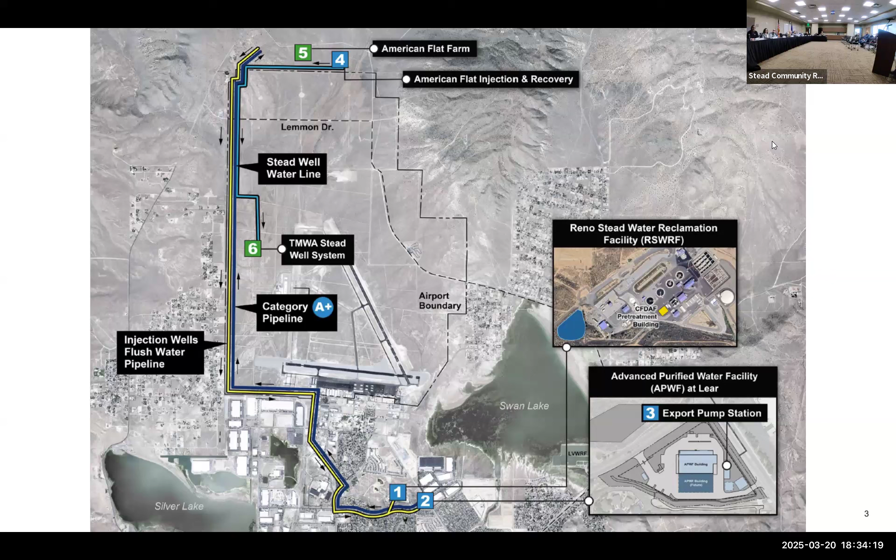Right now the effluent from that plant is discharged to Swan Lake. So this project allows us to take full advantage of that 4 million gallon per day treatment capacity - we can still send 2 million gallons per day to Swan Lake, and send another 2 million gallons per day up north to the American Flat aquifer for storage. That's how we get the 4 in and 4 out. Initially we'll be sending a lot of that flow to American Flat, which mitigates stormwater and flooding concerns at Swan Lake, so there'll be quite a bit less initially going there. That's a bit of the overview.

I'll turn it over to David Deagle to get into more detail about noise and other impacts during construction and after. Thanks, Dustin. David Deagle, Engineering Manager for Truckee Meadows Water Authority, for the record.

This is the American Flat treatment site - this is where we're going to treat it to A+ water. So the effluent coming out of Reno Stead, we'll treat it to drinking water standards, and like Dustin said, pump it out to American Flat, inject it into the ground to get that environmental buffer. In the future, we'll have extraction wells out there and make that connection to the Stead system for Truckee Meadows Water Authority. An initial benefit you'll see right away is we'll be able to rest the wells in the Stead system - the groundwater wells already here by the airport. We'll be able to rest those and use this water instead. This is a drought-resistant water source for us. It will always be here.

And so this is kind of the point for TMWA and what we're here for. As far as the CUP, SUP process, we talked about noise as a concern, so we wanted to bring that back through. This is the site a little bit.

I wanted to highlight a few things. The residential is here, you've got Lear and military, that's the corner. This is the main building where the treatment process is. Here's the transfer pump station moving water from Stead over. And then you've got a couple tanks here. We store the effluent here, and then that's the pump station that pumps it seven miles.

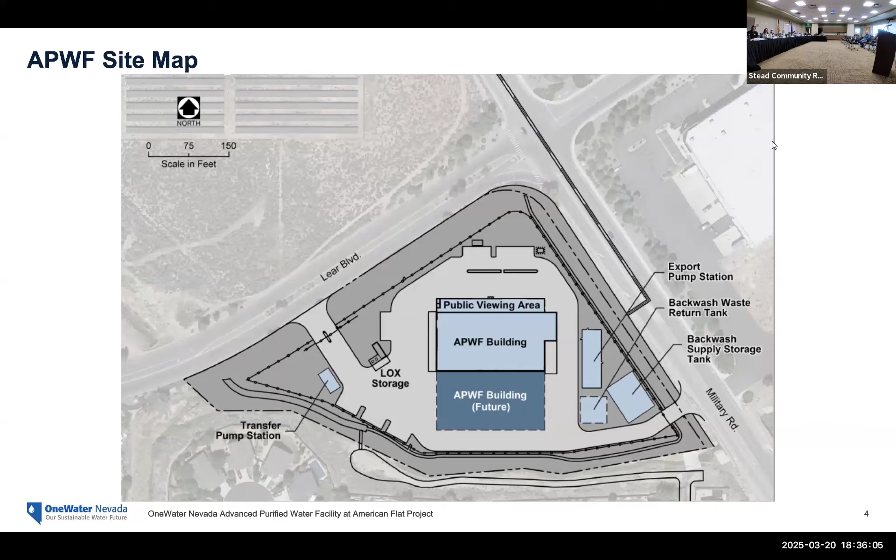If you would switch it, please. This is what the building's going to look like.

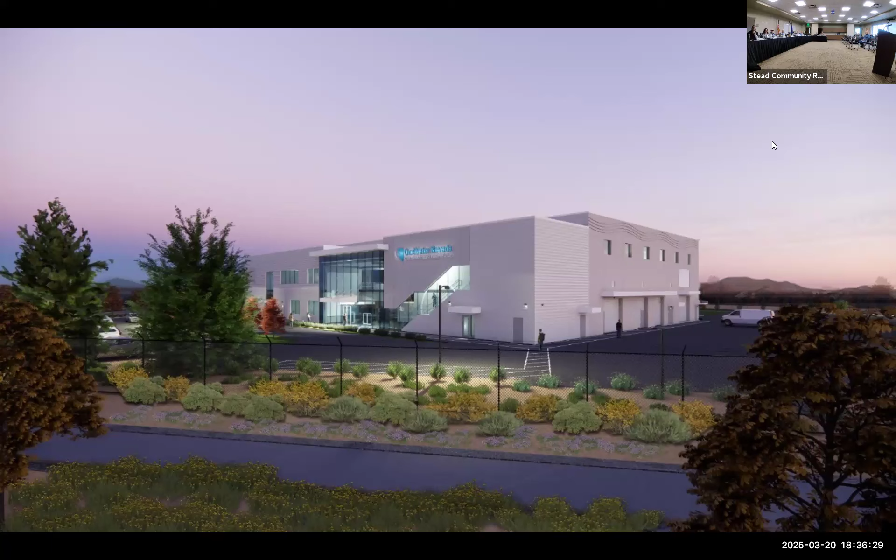You're standing a couple hundred feet down Lear, looking at the facility. This is the front. We've got a little education center in the front where we're going to ask the public to come in for school tours and that kind of thing. You get to learn a little bit about how the process works and how this technology is done elsewhere. But this is going to be new for Nevada, to create this, put it in the ground, and bring it into the system. The next one, this is another view looking from Horse Creek.

So the noise mitigation strategy, as part of the environment, we have federal funding and an environmental study that was done. A noise study is part of this, both during construction and after, and I'll be going through the results of that. The acoustical study demonstrated that in-building operations will not exceed the allowable noise thresholds per city code. The construction noise will be addressed by the conditions of approval of hours and days allowed in construction, which was part of that environmental study.

Go to the next one, please. So part of it is we put the treatment inside. There's a lot of reasons for that - it freezes and that kind of thing. Also, noise mitigation is very concerning to us. So our type of construction is we have insulated concrete panel walls. We do that for energy code reasons, but also for noise reasons. So it's quite low. We'll see in the next slide where we actually end up lower than the nighttime 49 dB, and we're also lower than the ambient noise in the area based on the study.

So we have limited hours of delivery. We only plan on delivering during the day, and I'll get into that. That's the National Environmental Policy Act - that was the mitigation measures done as part of that study. That report is available if needed. And then the Planning Commission conditions of approval, I'll go through on the next slide.

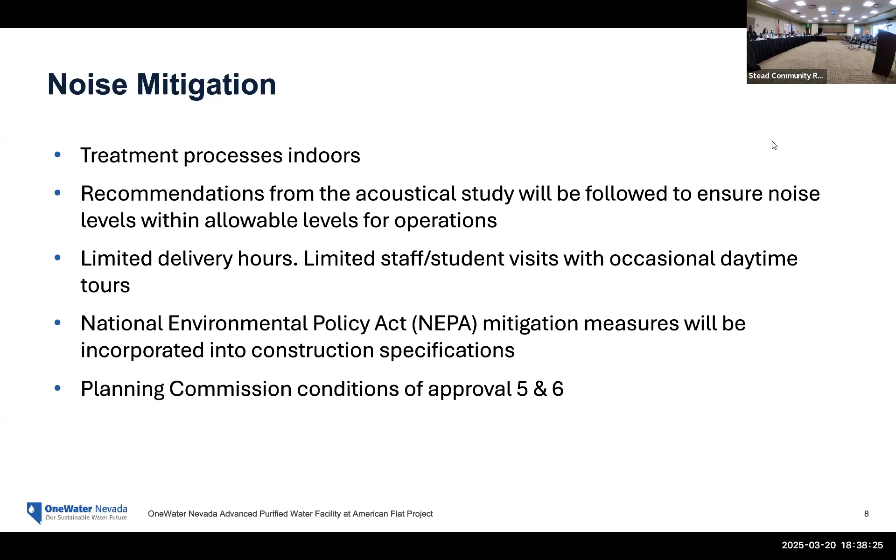This limits us, during standard operations, the truck arrival, departures, and on-site movement shall be limited to between the hours of 6 a.m. and 11 p.m. During standard operation, truck idling is prohibited on the site. Now, that doesn't mean our operators will be there 24/7, but they're just driving trucks in, and like I said, most of the work's inside. So this is more of the type of deliveries and that kind of thing. We will not be scheduling at night. The only time we'll actually have any trucks on site at night is if something was wrong and we had to fix it. This site is not critical, so I don't anticipate that actually having to happen - it should be very, very rare.

The hours of construction, including grading, shall be limited between the hours of 7 a.m. and 6 p.m. Monday through Friday, and between 8 a.m. and 6 p.m. on Saturday. There shall be no construction on Sundays except limited concrete pours approved by the administrator.

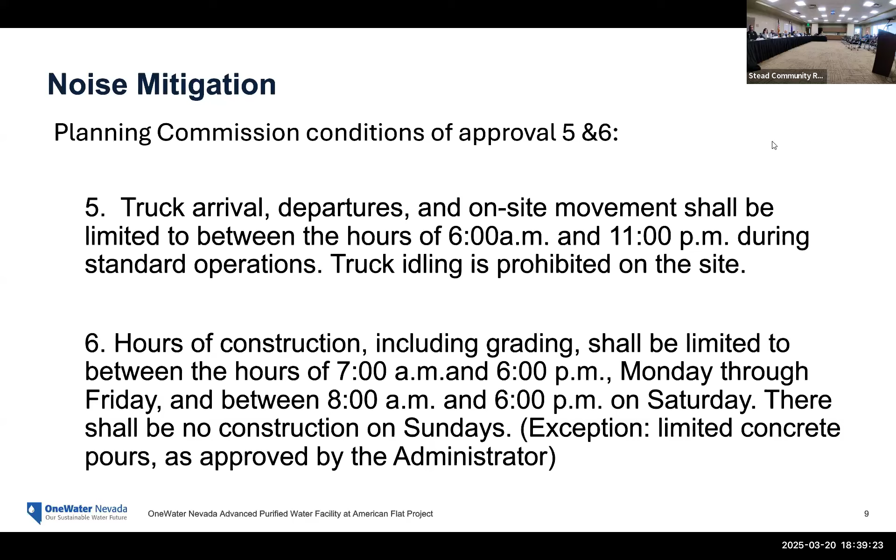So this is the City of Reno code. Nighttime only allows 49 dB. The sound study shows that we're below that. The study also showed that when they were on site, they had an ambient noise of 51.6 to 56.7 in the area. So we're below the ambient noise that you would hear in that area.

The loudest piece of equipment we have is blowers, which we use for backwashing our filters. Because of that, operators have to wear earmuffs since it's really loud, but we put it in its own sound room within the building, with 2 walls around it. So outside, you won't hear it like you would inside, but that is the loudest piece of internal equipment.

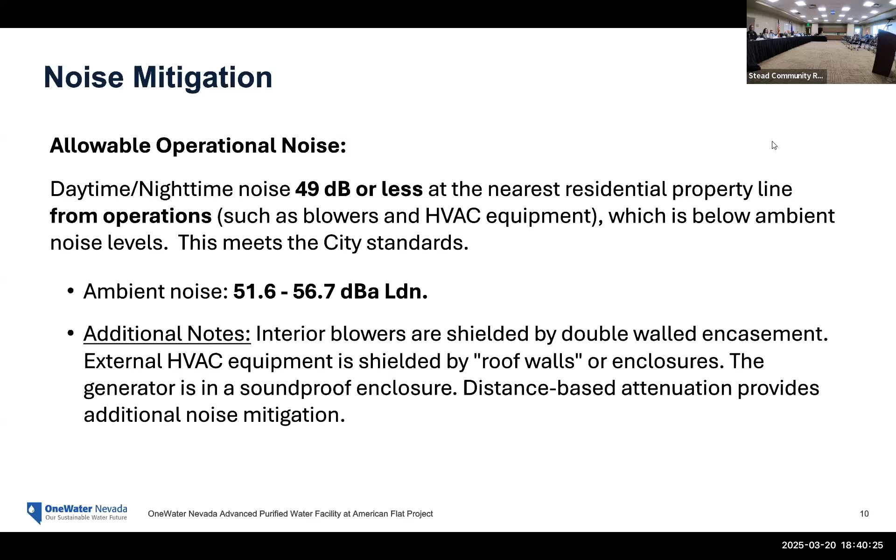That was what the study showed is the loudest part you could hear outside, but it's still low enough to be below the standards. So if you go to the next one, please.

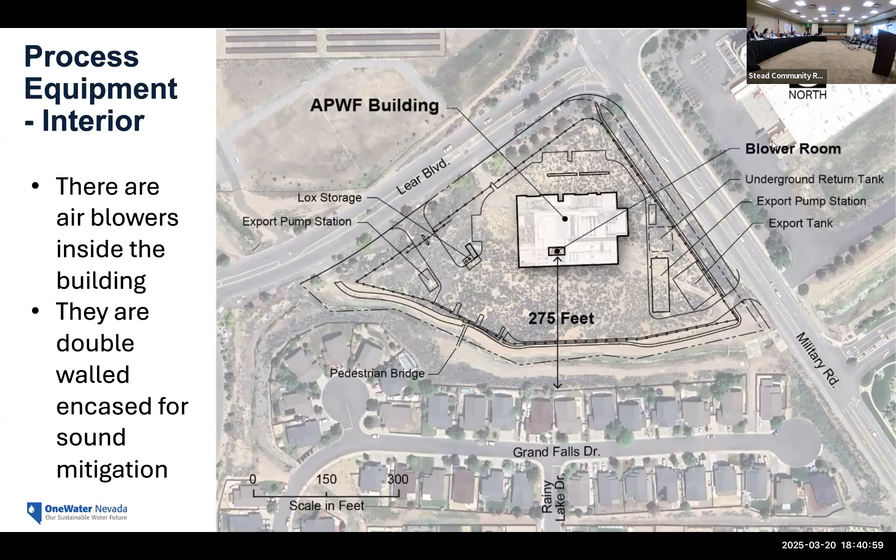So it's even safe enough for OSHA inside our building because of what we did there. Would you go to the next one, please? We do have HVAC on the roof, and that often is a concern. We have a parapet around the whole top of the roof, about 42 inches. That's for safety for our equipment and mechanics to be up there, but we also do that for noise mitigation.

So you have the compressor unit for the air handling units up there, and you can see the distances there. That was considered as part of the sound study. You can see there, it's a max of 44.4 at the property line. That slide is misrepresented—the sound study is from the property line, not from your house, which you can see here. That's actually what that is supposed to be. It's not to your property, but you stay further away from the homes.

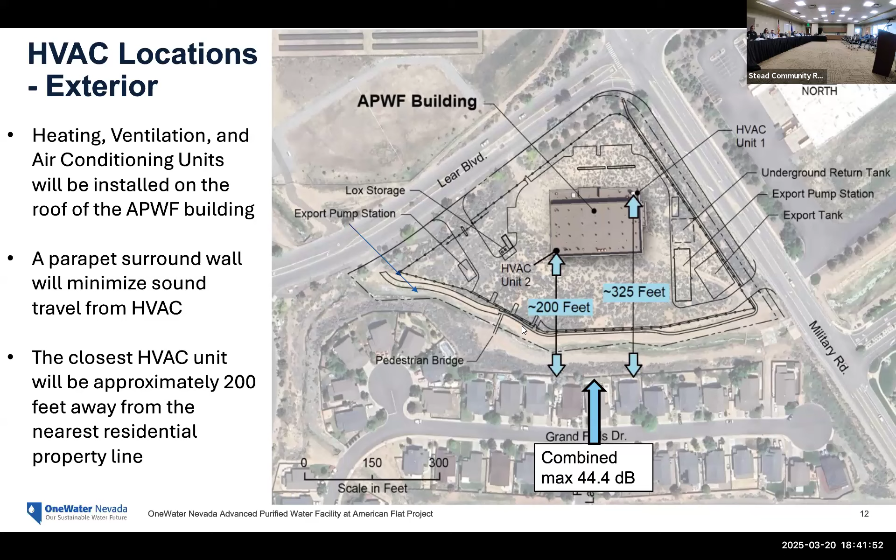So, you go to the next one.

So for construction noise, we're going to have mitigation measures as much as we can. We don't want use of idling equipment, electric power equipment as much as possible. Noise control blankets, barriers—the hours of operations matter. It is a decent amount of construction time; we're looking at a 30-month window, so 2.5 years. So we want to be good neighbors as best as we can. Construction is just one of those things.

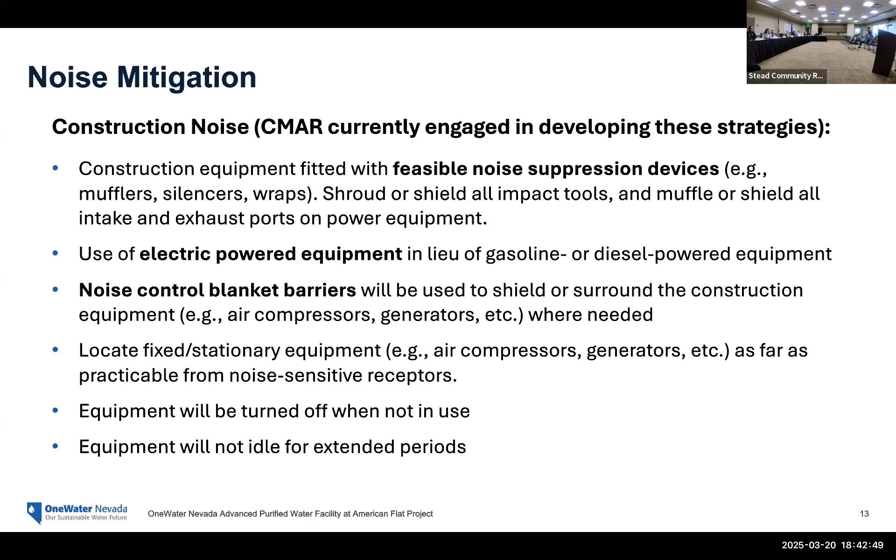But in that study, you can see the measures here—mufflers, silencers, wraps. We are a CMAR process here, so the contractor's been involved the whole time. We've been communicating with him about what's required. That's probably a good thing for us, is we're not low bid or anything like that. We got a contractor that's a partner and has heard all these concerns throughout the whole process. Go to the next one, please.

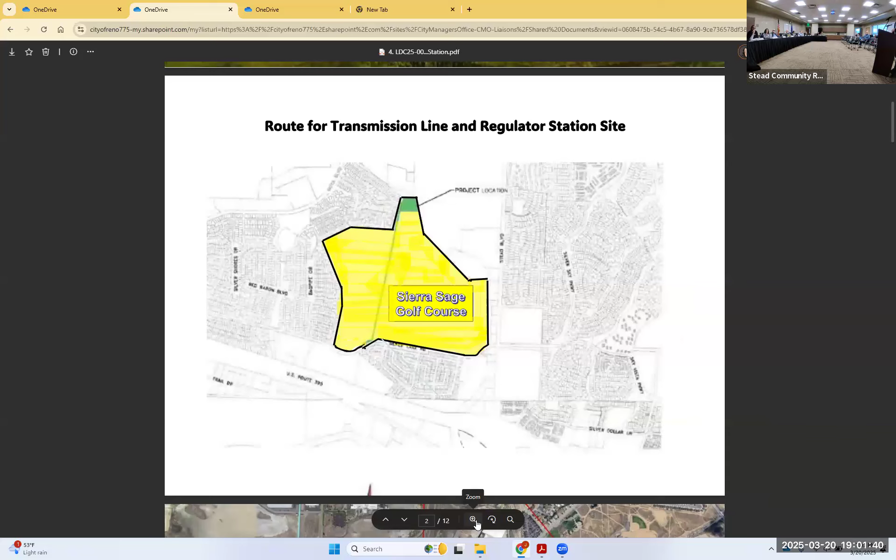So this is the highlighted area, the golf course area, and you can see not very well. There's a line, actually on the next one I'll show you, but you can see the little green tip out there. That's where we're proposing to put a regulator station. There's a line that runs from the south end of that site at Silver Lake and goes north up to that side on the north end of the golf course.

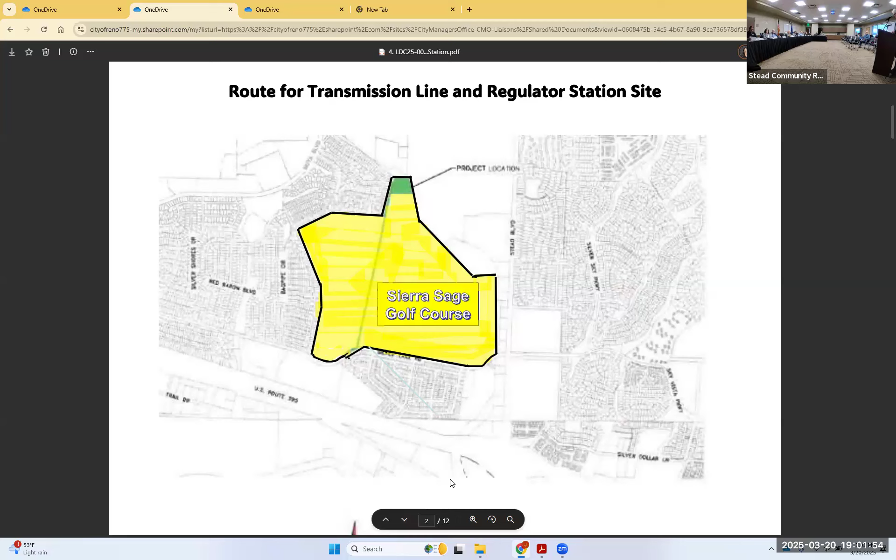Can you go to the next slide for me, please? So the blue and red lines you see there are existing electric transmission lines. There's a substation right where the blue and the red meet. That green arrow is pointing to the site where we're proposing the regulator station.

So that blue line runs all the way up. There's a system in place already for electric, and for gas, we're just going to hook up to the existing gas lines that are in the area for the customers out there.

State law requires us to have a project of regional significance. If it's a gas regulator station or a substation, there's like 4 or 5 different criteria in state law. So that's why we have to apply for it.

This actually happens to be in the regional plan. It's consistent with that. They have a hierarchical system in the regional plan where they ask you to locate utilities where other utilities are already located. That's the highest level they like to get, and then all the way down to greenfield or brownfield development.

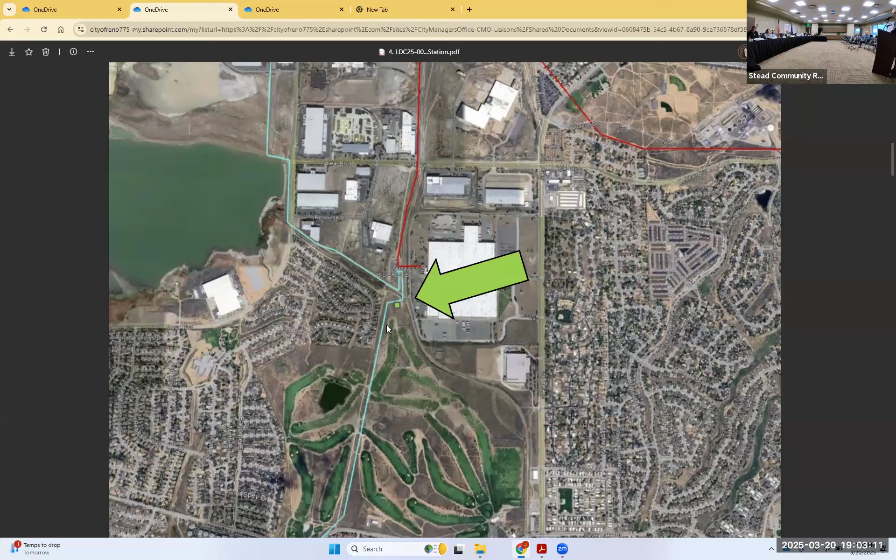So there's an existing line there. We're locating it where that blue line is. We're going to go along that line for the gas line and then into the regulator station. And then we come back out, like I said, and hook up with the rest of the existing systems.

The next slide would show you kind of a blow up there. That green site is the size of it, or the location of it. It's 95 feet by 60 feet, so it's a little less than 6,000 square feet.

Basically a regulator station is everything underground with the exception of what's in the regulator station. The gas lines come up out of the ground and then go into some valves and regulators, so we can monitor pressures and those types of things. You monitor what the load is, what the usage is. Peak times in the mornings when you get up, throw something in the washing machine or cook something on the stove, go off to work, come home at night, and you see that peak load come up again. So the closer we can get these regulator stations to where people are using the gas, we also get to reduce the pressure, which you're always looking for. So these are real close to where those loads are.

One of the other challenges we have with underground vaults, the PUCN likes us to get away from using those. Those designs were done quite a few years ago, and they can have problems with water infiltrating into the system and causing problems. But also, if you have a gas leak, you don't know where it's going to end up. It can migrate underneath the ground, and it's really hard to track that stuff.

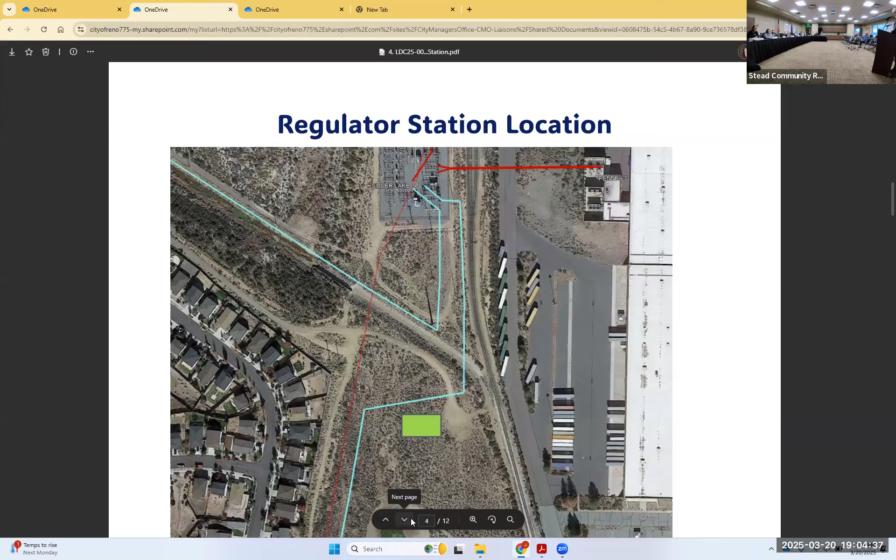So the overhead design is on the next slide, and that's what they like us to use. You'll see these lines come in, they go through. You see these little dots; those are regulators and valves, and then it goes back out. Nothing like the last project though - this is a pretty teeny project compared to what those guys are doing.

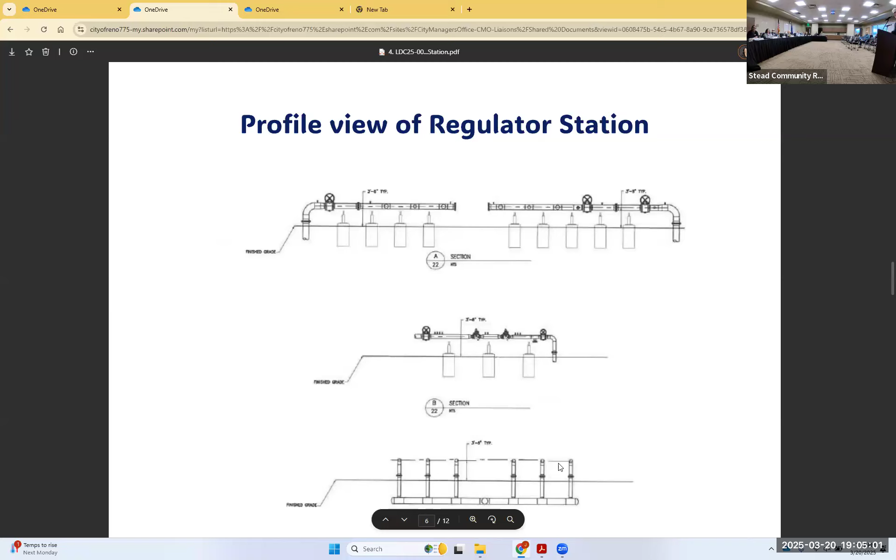The next slide will show you a profile view of the piping. The top height there is a little bit less than 4 feet. So it comes out of the ground about 4 feet high - maybe about this high.

What we're proposing to do is put a chain link fence around it with slats to screen it. When we went out and looked at the site proper, it has about 4 or 5 feet of varying sagebrush out there, so we weren't proposing to put any new landscaping in.

What we've found, having done several of these - like one we did out in Spanish Springs - is that when you put a bunch of landscaping around it out in the middle of the desert, you get all this green stuff, and it really draws your eye rather than blends in. If you take 395 or Old Virginia Street home, you'll see just past Talus up on the hill one of these regulator stations. That one's a little bit longer than what we're proposing, but it's narrow too, and they really blend in - you don't really see them that much.

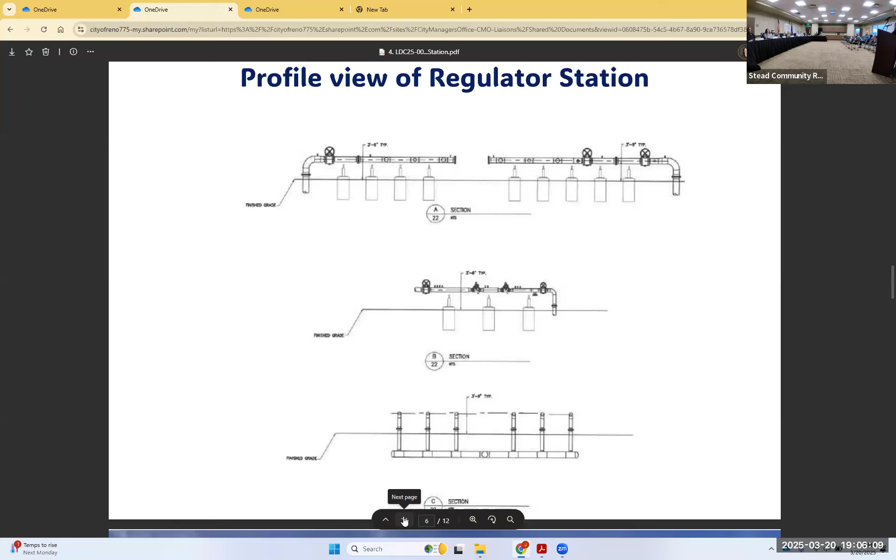So like I said, it's not a very big one. It's a 6 foot high fence. That's pretty much all I have. I don't know if you guys have any questions, I'm happy to answer them.

Thank you. I do not have any questions at this time.

Any questions? I have one, for the record - I wanted to ask about it being placed really close to residential. What are the odds, and I know this is very slim, but I'll ask anyway - just like the university that had green glowing fire come up from their cement floor this week - what happens when this starts leaking or something happens? What measures are in place to make sure the neighbors aren't affected? Well, this is designed so it can dissipate up into the air and that's not going to affect anybody, but we monitor pipe pressures. So if something drops like that, we shut it off and go out and check it to see what's going on. And you can do that remotely - yes, we monitor what the pressures are. We're a statewide company with hundreds of these, but we haven't had problems like that. There are standards for construction and a lot of different safety measures in place, so we typically avoid those things. We see it coming - if you have a pressure drop, something's happening, you shut it off, go out, look at it, and take care of the problem. Thank you.

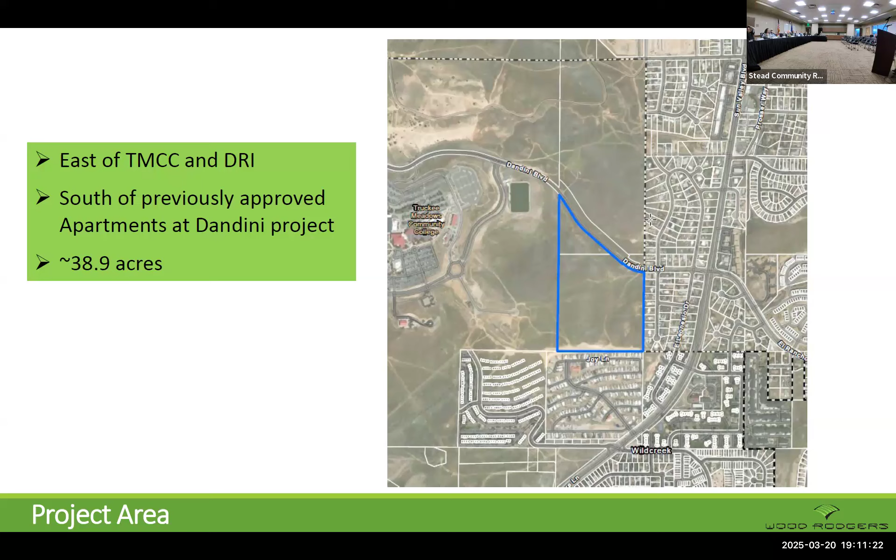So for this project, we're talking about the 2 parcels on the south side of Dandini. They're outlined there in blue. The 2 parcels combined are just shy of 40 acres in size.

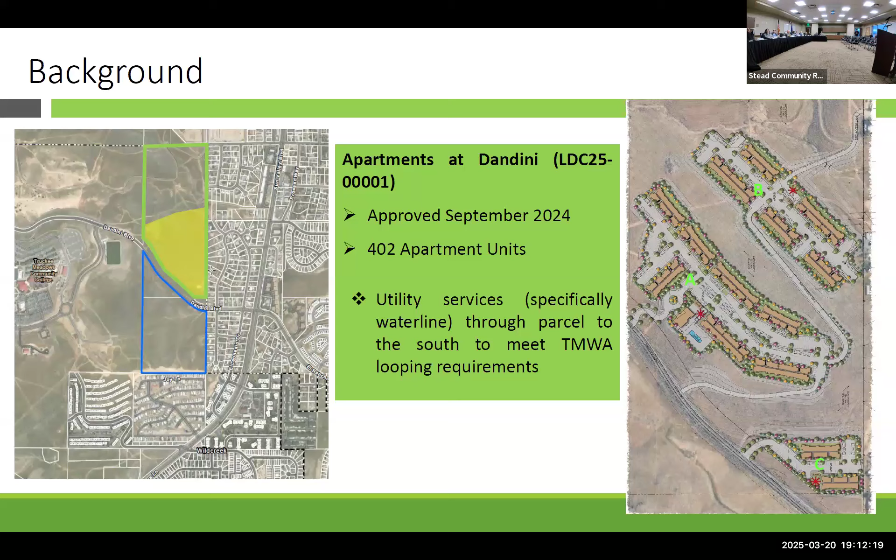I just wanted to show you where these sites are so you can understand how they're connected. When we did the apartment project initially, we had to bring utilities to these projects, and one of the utilities needed was a water line. In order to meet TMWA's requirements for water looping systems, the water line, due to pressures and topography up there, has to have a looped system. In order to loop, it has to go south through the parcels that are the subject of this request, and then loop back to the west through the DRI parcel, up Raggio Parkway, and back around.

Just to clarify, that was all reviewed and approved by TMWA as part of the apartment project. So what we're here for today - I think the zoning is okay. What we're really here for is just to get the water line, and I'll call it the access road that goes over the water line, because there has to be access to the underground water line, approved, built, and constructed.

So there are two parts to this entitlement. There is hillside development because the site triggers slopes over 15%, which you'll see on the next slide, and then grading related to fills that are over 10 feet in depth.

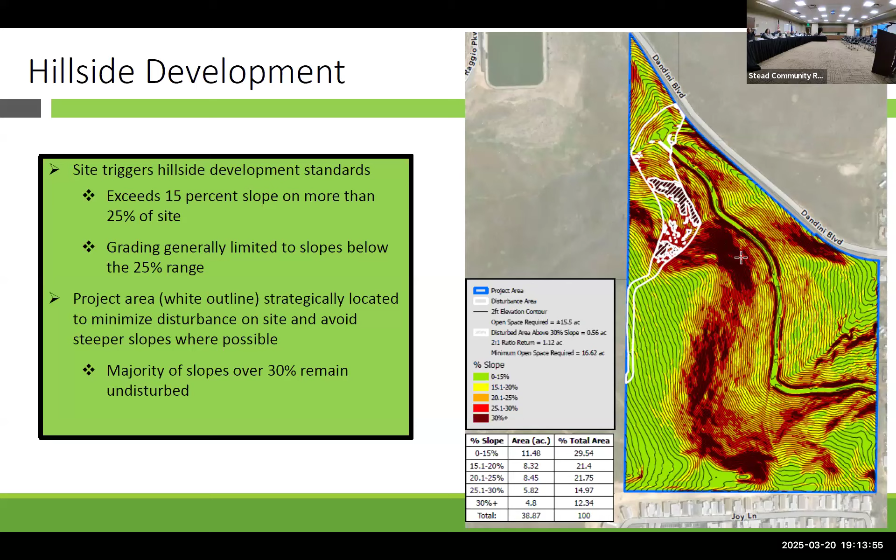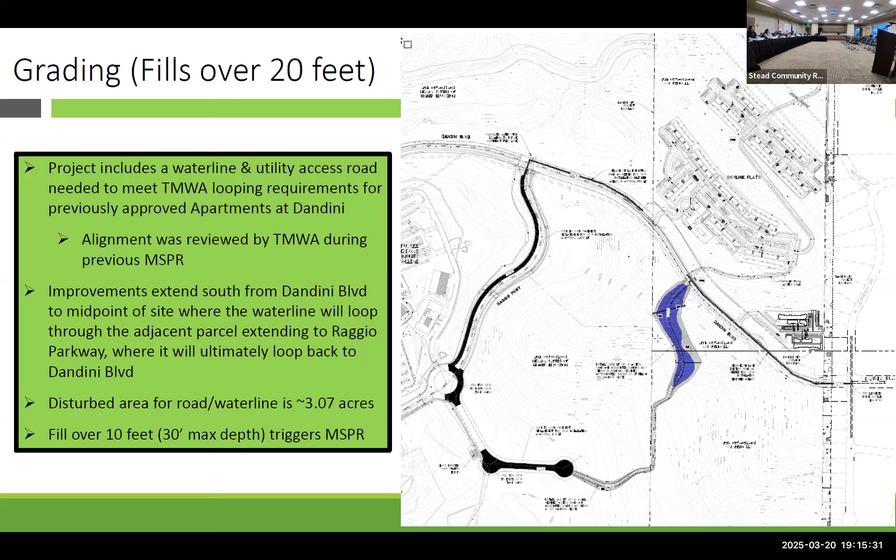That is a very high-level summary of this project. We are here tonight presenting to you, and we're scheduled for Planning Commission April 16th. Jeff Foster is our planner - if you have questions, you're welcome to reach out to him. My contact information is there, and if you're interested in a copy of our application, it's available through that hyperlink. I'm available for any questions.

Thank you very much. I do not have any questions. I do not.

No questions. Jared Souther for the record. I took this travel path tonight because Waze said go on Sun Valley, go to Dandini. Help me understand on that path there, the land that you're putting the grades to get the water line in, is there any plan to develop on it?

So right now we don't have a plan. I mean, I can't say that it won't happen. That piece of property, maybe you could pull up the zoning map again for me, just so I have something to look at. That piece of property is zoned mixed use suburban, so it has the potential to be developed. I think it's my second or third slide, and actually maybe you could pull up the hillside map. It might help me talk a little bit more.

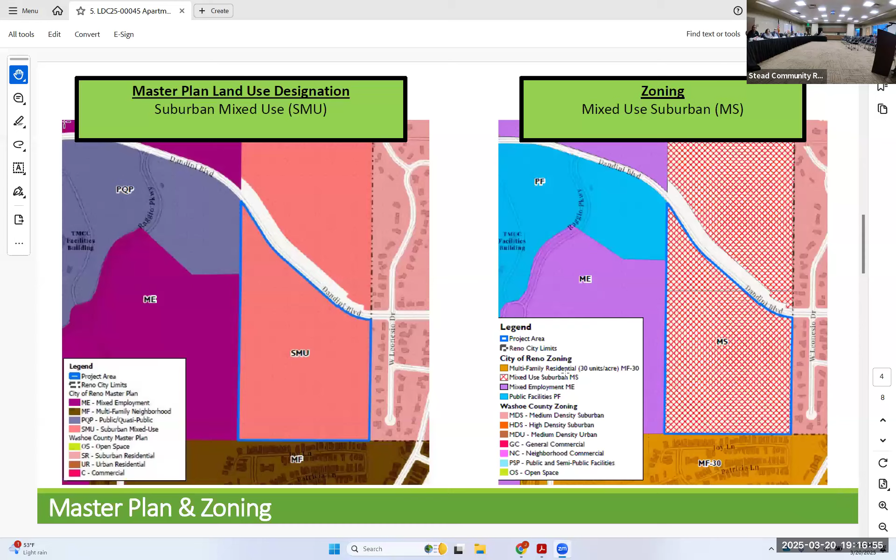One more, or two more? Right there. Thank you, that's perfect.

So the zoning will allow development of this parcel. I think when you look at something like the hillside analysis map there, you can see where there are some developable areas within this parcel. So I can't say with certainty that there will not be development on this parcel. It has the potential to happen. It is not part of our project at this time.

So it's a separate ownership, or do they own that, to be able to do work on it? The developers of the apartments at Dandini do not currently own this parcel. But because this water line is for their project, they're the applicant, but the owner signed an affidavit acknowledging that they know this is coming.

So the owner of the property could potentially bring development on this parcel. What we're doing will not stop them from developing this parcel. In fact, the water line and the road going through it could help them ultimately, because it's going to define the access that goes out to Dandini in the future. If this parcel is ever developed, it is likely that any road alignment will follow what we're bringing forward with the water line.

I apologize, I'm going to deviate and ask a question. The Pyramid Highway connector that's supposed to go to Parr Boulevard, is that aligned north of your project, or is it going to be right there? That came up as part of the apartment project. There's been discussions about that alignment going north around the project. We had discussions during the special use permit for the apartment project with RTC. We've acknowledged that we understand there's a potential for that, but our understanding, confirmed by RTC, is that they have not to date gone out to acquire land for that alignment. And while it may be on their books, it's not currently something that they are holding up development to accommodate.

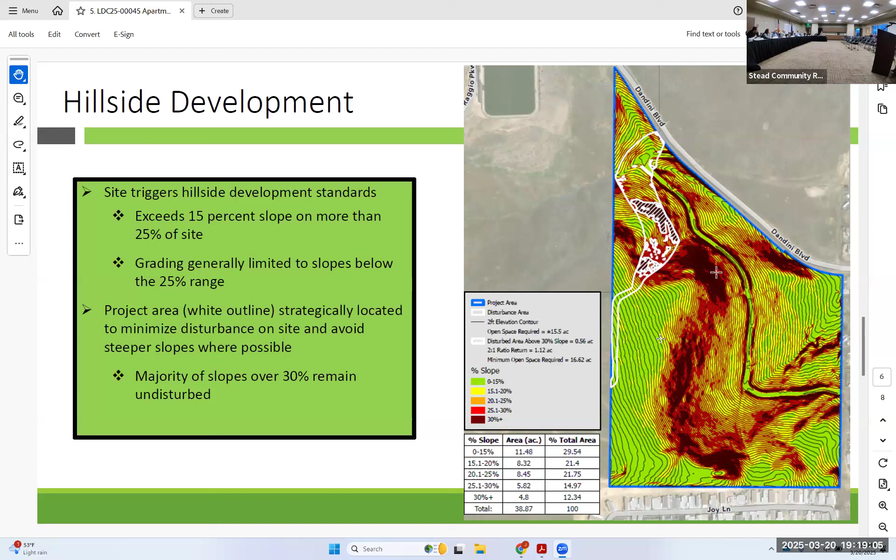Any other questions for the board? Seeing none, does the public have any questions? Seeing none, thank you very much for your time. We appreciate it.